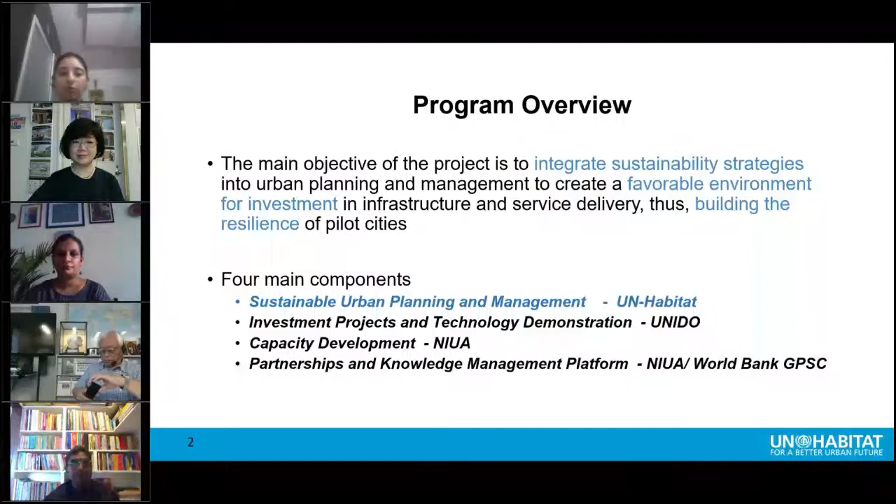Coming to the components of the project, there are 4 major components. UN Habitat is looking at sustainable planning and management. UNIDO is responsible for investments and technology. And the National Institute of Urban Affairs is doing capacity development and managing the platform for knowledge exchange for all the cities. So I'm going to break down the first component.

The major outputs are the Sustainability and Resilience Assessment Framework for Spatial Planning in India. This would be applied to the cities to develop city profiles and diagnostics, which would lead to the Sustainable City Strategy and specific actions and interventions. Finally, there's the Spatial Database for Continued Assessment that will enable the cities to run different scenarios in the future and test the impact of potential projects they want to implement in terms of their overall impact on the city.

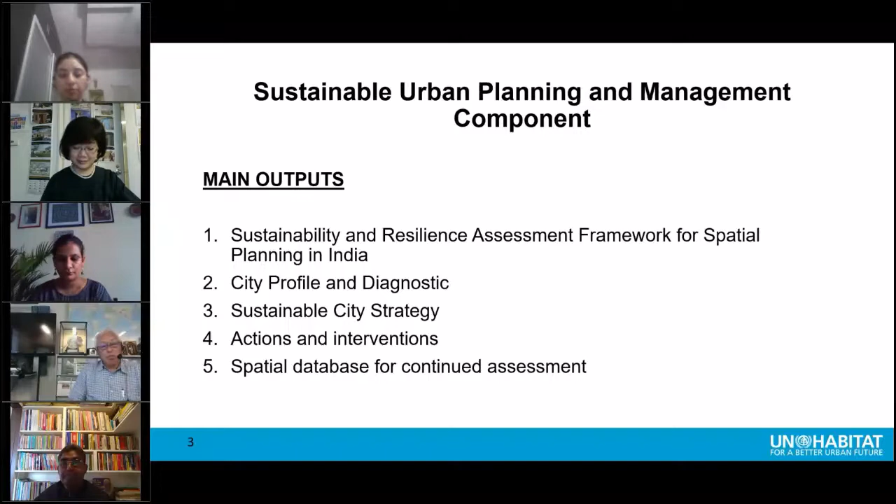Coming to output 1, this assessment framework is geared for spatial planning and is being developed by assessing select existing global and national frameworks. The indicators cover sectors including mobility and accessibility, density, disaster, health, sanitation, waste management, and so on. The idea is to understand how the city is performing on these parameters and benchmark them against global and national best practices. This framework would be scaled up and rolled out at the national level for other cities so it can inform the strategic direction and spatial growth of the cities.

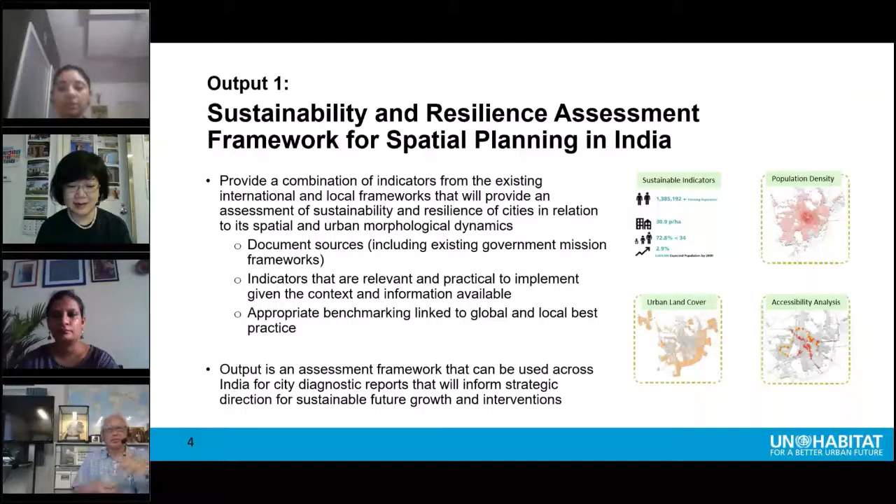The second output is the city profiles and diagnostics. These would be created by applying the assessment framework we are currently developing, then identifying 3 to 5 main sustainability and resilience aspects that the city needs to address, and examining the underlying causes for the indicators' performance compared to benchmarks. On the right side are example diagrams — not to say these will apply to our project cities. We have a map looking at walkability and job accessibility. In the diagnostic, the spatial analysis would show things like population distribution, where jobs are concentrated, and accessibility to essential services like clinics, schools, economic hubs, or public transportation, within a 10-minute walking distance, for example.

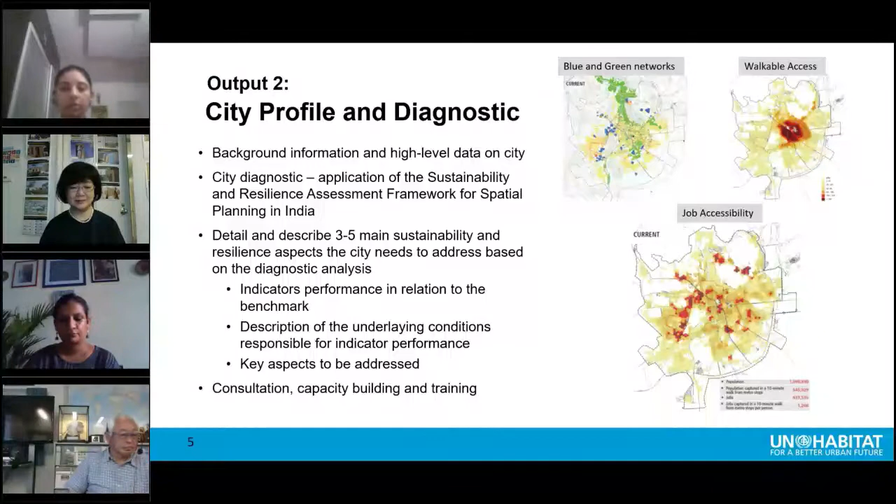That brings me to output 3, the Sustainable City Strategy. From the diagnostics and consultations with the cities, the strategy would identify strategic areas for intervention and investment. It would provide critical spatial and development interventions to address the main issues, analyze the current and proposed development scenarios and how that would impact the city's future, and include a methodology for strategic spatial planning and capacity building for stakeholders.

In this example, on the right side, the strategy of urban density shows the indicator shift as increased density in the city in the future. And that density increase would be at the right places to direct investment and planning together.

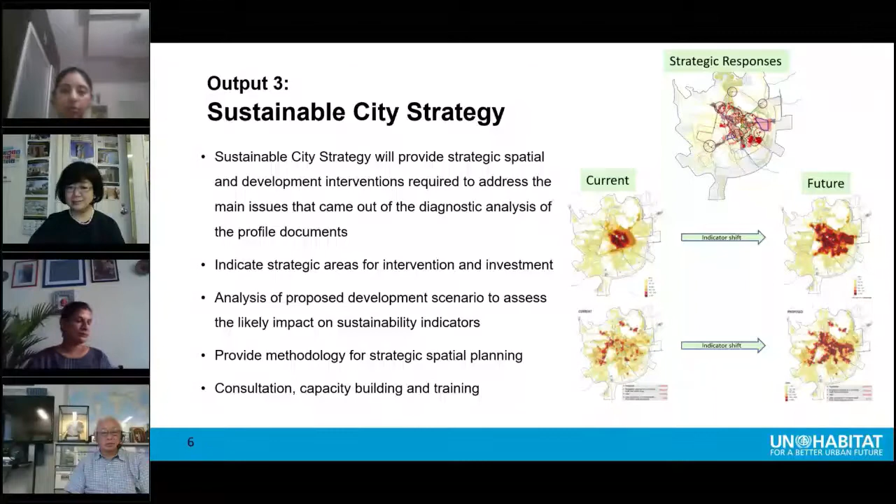Coming to output 4, which is the actionable next steps. These are the implementable interventions that would be identified, with potential projects that could be taken up, backed by data and evidence for the reasoning, and showing how it will shift the indicators towards sustainability. This would also include handholding for cities to adopt and institutionalize the methodology, and build capacity of the cities and regulatory tools for this type of data-driven planning and management.

So this is basically the summary slide highlighting the iterative process that we are following in the project for all of the outputs. The entire 3-year project is a process that has a feedback loop with the cities we are working on and with all the stakeholders. The main outcomes are strategic projects and interventions that we can identify in partnership with the cities, and then investors can be brought in to develop those projects with the cities.

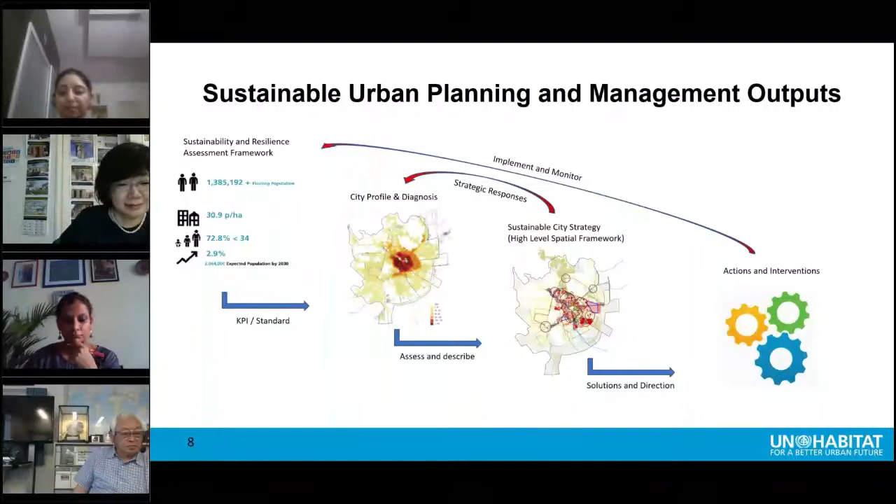May I now ask all of you to take another poll, which is what is the main reason for mismanagement of waste in your city? So kindly fill the poll. We see that broadly in cities, sometimes it's lack of segregation incentive mechanisms which lead to mismanagement of waste systems, or it's lack of administrative will, or probably sometimes the infrastructure does not support effective and sustainable waste management, or is it lack of robust policies or bylaws at city level to ensure compliance, or you feel is it all of the above? So kindly enter your answers.

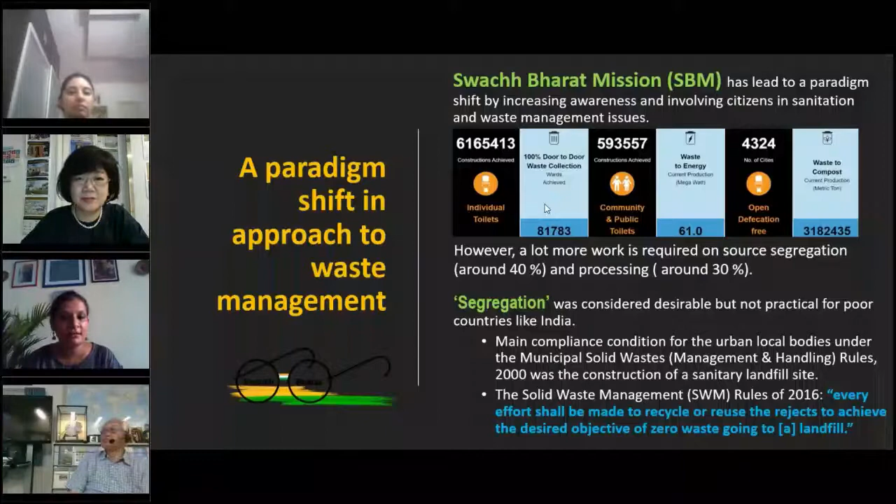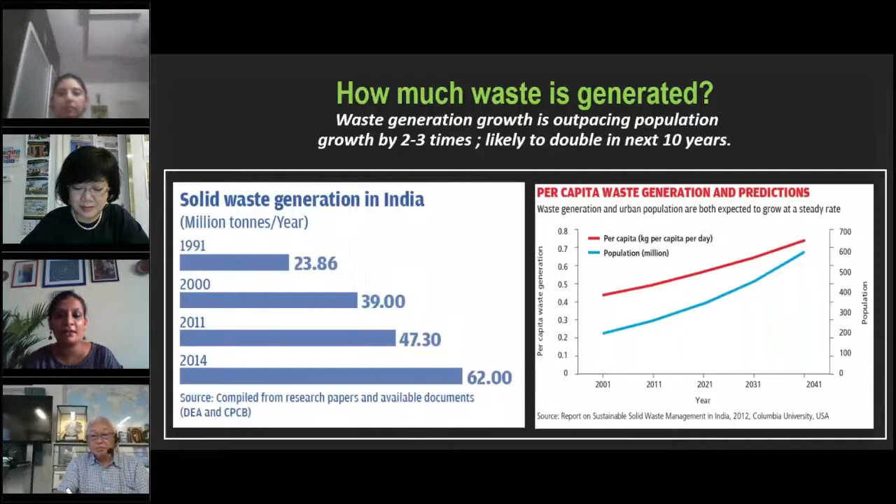Coming to where we are with waste management, of course, we clearly know that waste generation growth is outpacing population growth by 2 to 3 times. It's likely to double in the next 10 years. We are somewhere around 62 million tons per annum as per official figures, but we clearly know that the numbers are much higher because most of these values do not add up the waste managed by the informal sector. But we clearly know that as we are becoming more prosperous and developed, the waste generation patterns are also increasing.

Coming to the important question of landfills, every city, every ULB wants a landfill or they have numerous dump sites, but where is the land? As per various estimates, and as per the official 2016 estimates, India added about 31 million tons of waste to the legacy waste in its dump sites. As per a recent World Bank report, What a Waste 2.0, which came out last year, it said that in South Asia about 3/4 of the waste is dumped in open dump sites, which is quite alarming.

Another figure I'd like to share is that if we keep on dumping the way we are, by 2047 we'll reach a time when we would need land the size of Hyderabad, Chennai, and Mumbai added together just to dispose of our waste.

As per CPCB's latest data on dump sites, a report that came last year, India still has over 3,000 operational dump sites. Most of them are in Uttar Pradesh, which tops the charts with the number of dump sites, followed by Madhya Pradesh and Maharashtra.

If you look at the interventions happening in India in terms of remediation of these open dump sites, or what we call landfill remediation, it's majorly limited to landfill capping and biomining, which are considered to be the two most common solutions practiced on the ground in various cities.

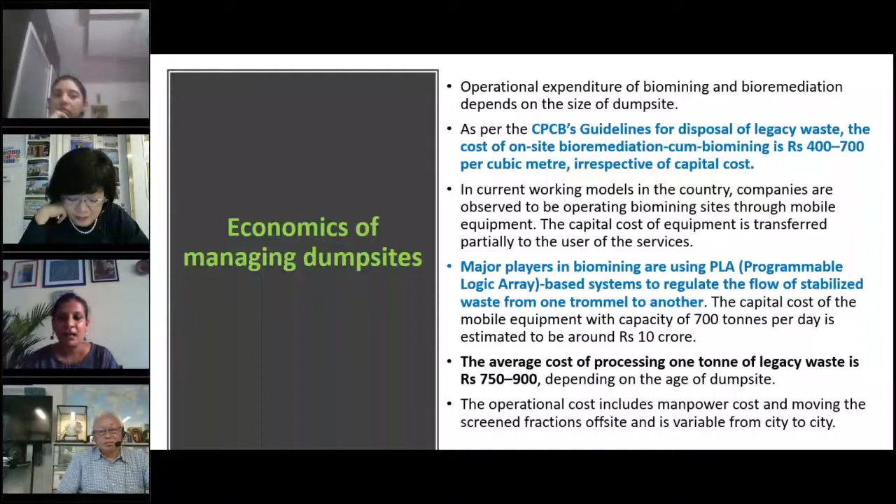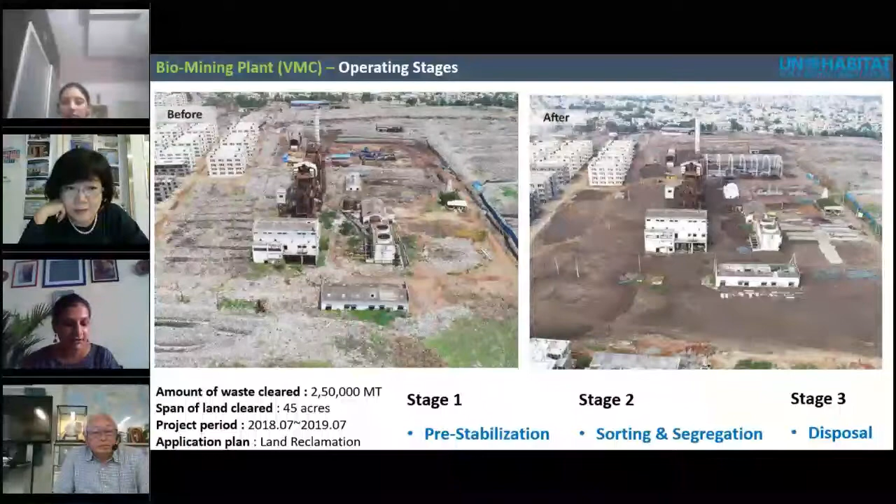Taking you forward with an example of an intervention that happened in Vijayawada, where an existing dump site was remediated. As we can see, over 250,000 metric tons of waste was cleared from this site. You can see the before and after pictures, and about 45 acres of land was remediated over three stages.

The three stages were pre-stabilization, sorting and segregation, and disposal. The project took about a year for reclamation of the land.

These were some of the interventions: after segregation from such a facility, the fine soil is typically used for afforestation purposes. There's still some soil which is not good enough to be directly used for horticultural practices, but it could be used for filling in low-lying areas.

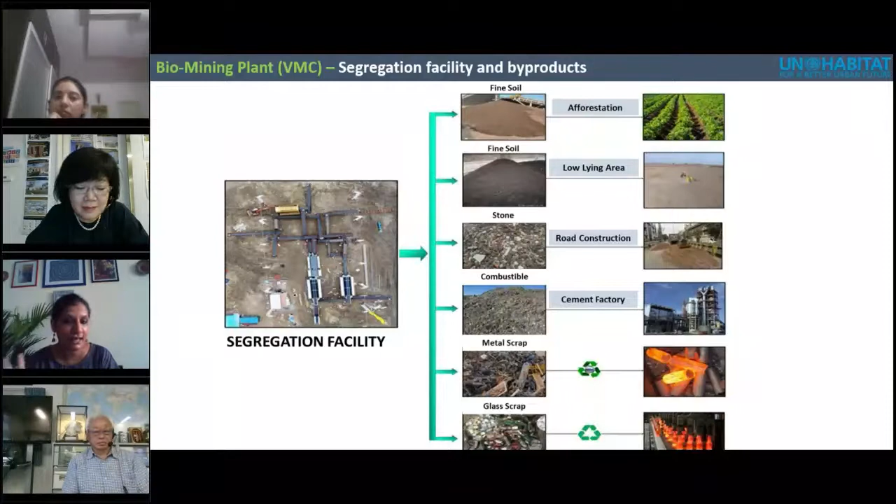Stone is used for road construction or embankments. Most of the combustible fraction that comes out from legacy sites could go to cement factories or incineration plants. Metal scraps and glass scraps could go for recycling. So majorly, this is the protocol being followed.

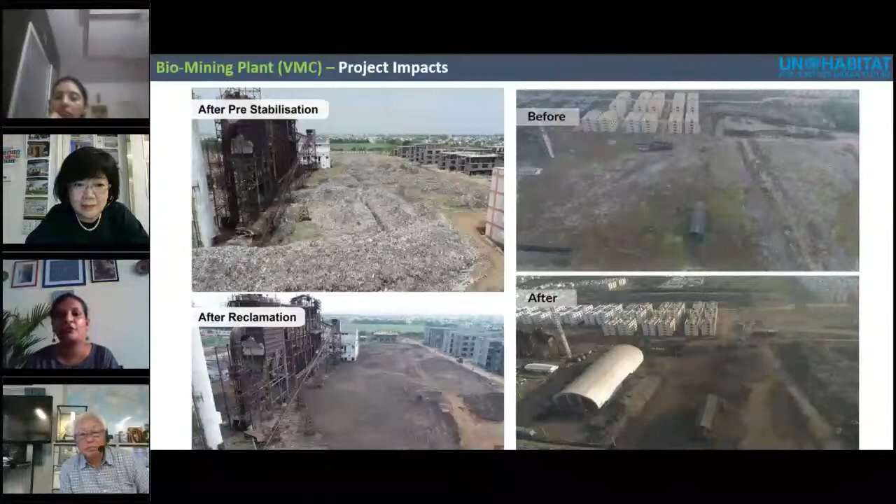You can clearly see the pictures after pre-stabilization and reclamation, and how the site looked before and after.

But there are a few challenges that remain, and I'll leave you with those questions. One is that urban waste management is expensive. If we look at municipalities in India, typically municipal budgets account for only 10% for solid waste management.

Many municipalities lack this budget to opt for landfill remediation. So probably a small city in Bihar or a small city in UP with a major issue of dump sites won't be able to go for such technologies because they don't have the bandwidth or budget to take these interventions forward.

There's also an urgent need to look at affordable and effective integrated solutions for landfill site management. In the Indian context, we basically need more solutions for dump site and landfill management focusing on utilization of local resources, which emphasize segregation, recovery of recyclables, and provide jobs to the informal sector, which is critical.

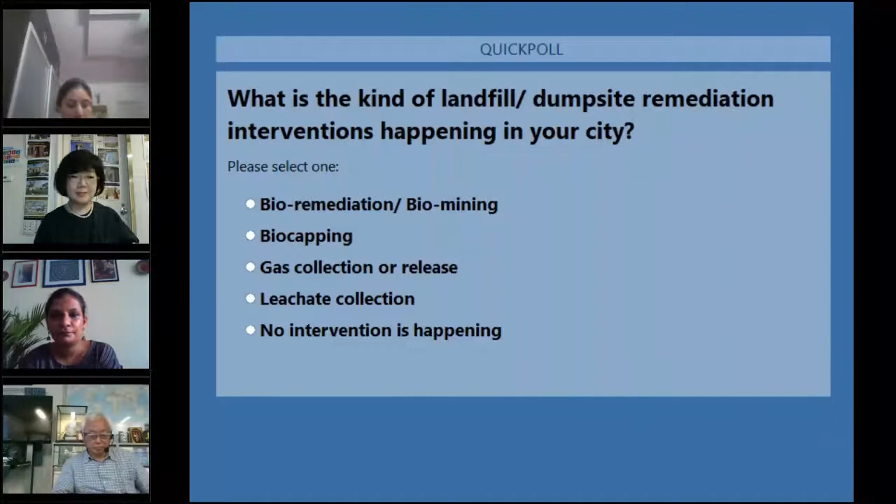So please take your time to fill up what kind of landfill dump site remediation interventions are happening in your city. Is it bioremediation? Is it biomining? Is it biocapping? Have there been interventions on gas collection or release, on leachate collection, or is there no intervention happening at all?

Okay, can we publish the results of the poll?

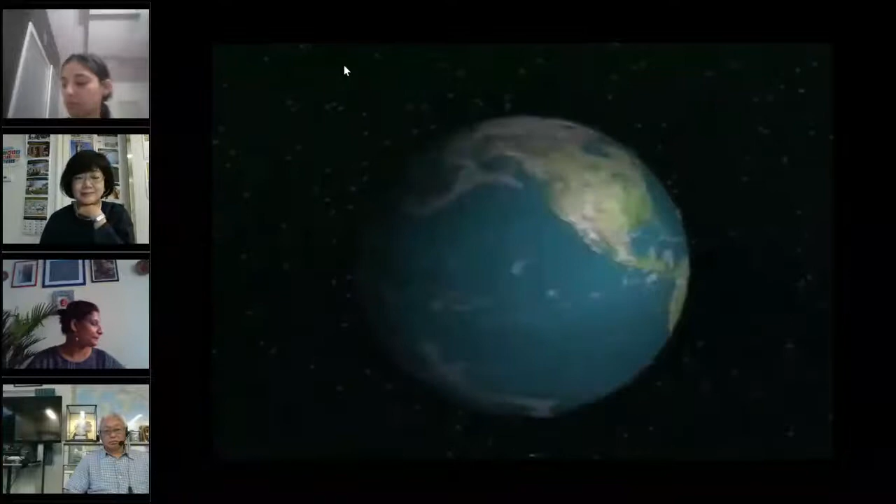The Japanese islands, situated on the western rim of the Pacific Ocean. Fukuoka City, located on the northern part of Kyushu, one of the Japanese islands, has a population of about 1.3 million. As one of the leading cities in Japan, this metropolis continues economic development, but despite its million-person population, still maintains an excellent urban environment.

From the late 1960s through the 1970s, however, Fukuoka City faced severe problems related to the management of waste generated by this economic development. At that time, most waste was disposed of through simple landfill, and landfill management efforts were unable to keep pace with the influx of waste. The landfills generated noxious odors, contaminated leachate, and methane gas, and often suffered major subsidences.

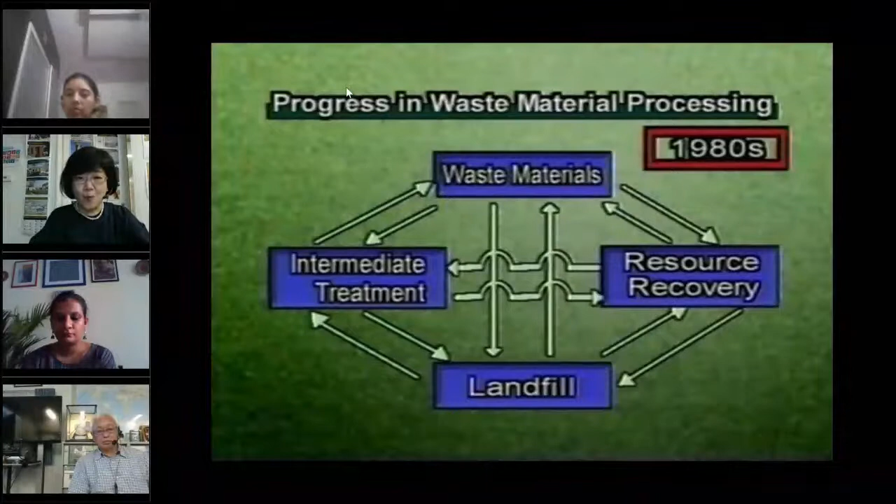To resolve these problems, Fukuoka City constructed a series of intermediate treatment facilities, and at the same time launched a joint research program with Fukuoka University. Today, these efforts have resulted in landfills maintained in excellent condition.

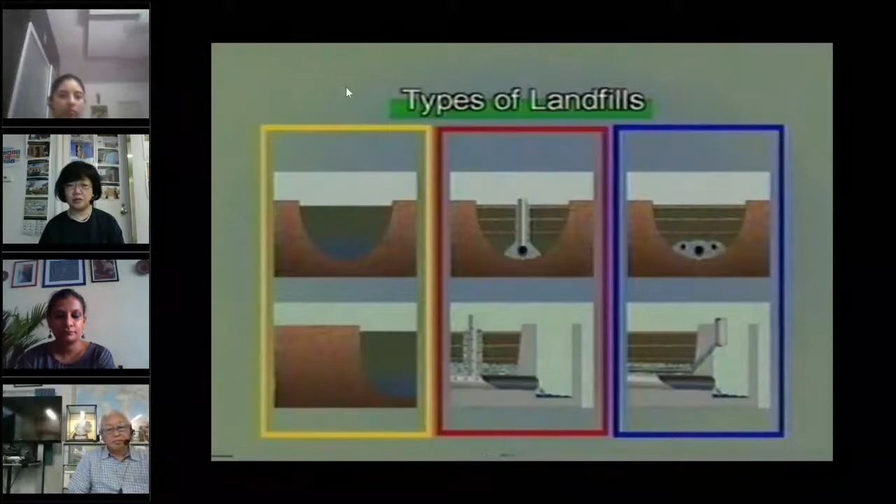Let's take a closer look at the Fukuoka method. Fukuoka University noted the importance of air and microorganisms in the landfill waste layers, and classified landfills into three types: the conventional anaerobic type, the semi-aerobic type, and the aerobic type.

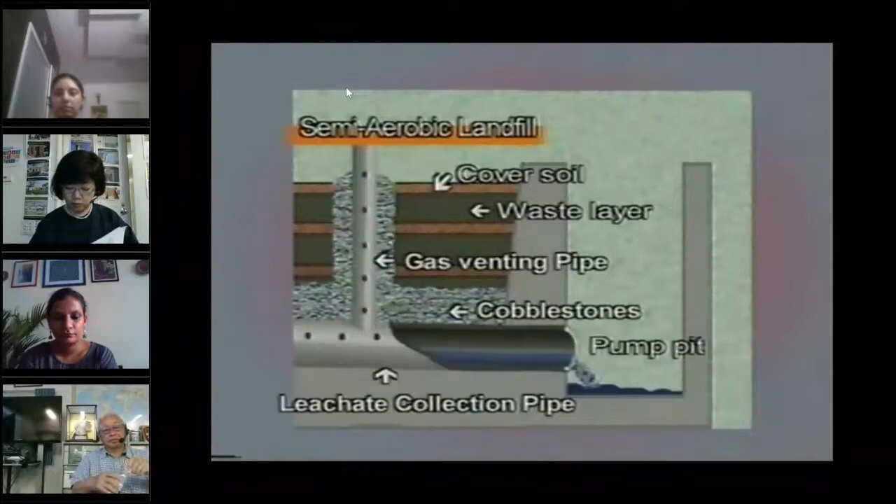The concept of the semi-aerobic landfill was developed and proposed by a group led by Professor Masataka Hanashima of Fukuoka University. After the concept was demonstrated through practical trials implemented jointly by Fukuoka City and Fukuoka University, it was christened the Fukuoka method.

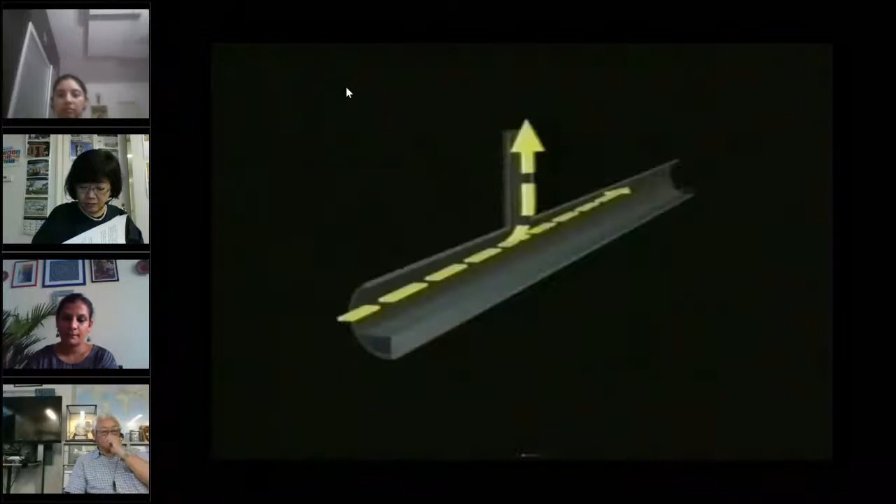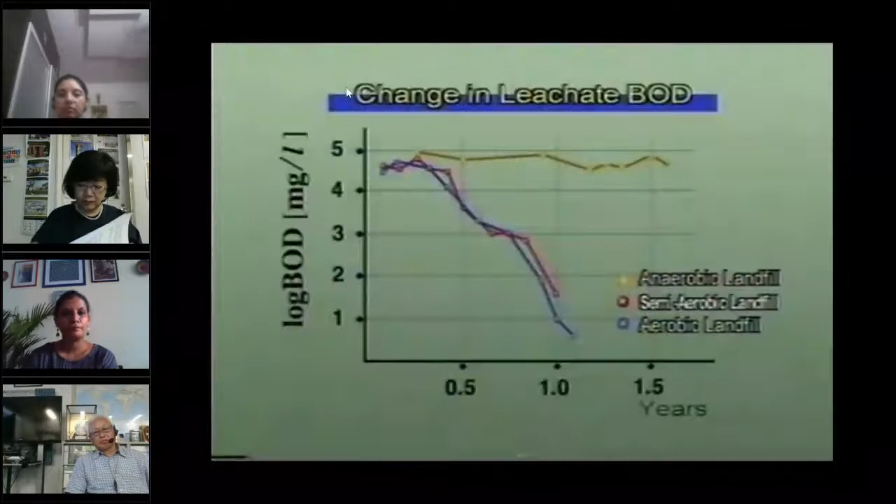The basic structure of the Fukuoka method landfill is a network of perforated pipes with a sufficiently large cross-section laid across the bottom of the landfill. This design not only prevents leachate from stagnating in the waste layers, it also utilizes the thermal convection currents generated by microbiological reaction within the waste to draw outside air into the landfill through the drainage pipes. This flow of air promotes biologic activity by the aerobic microorganisms, which improves the quality of the leachate flowing through the waste and suppresses the generation of methane gas.

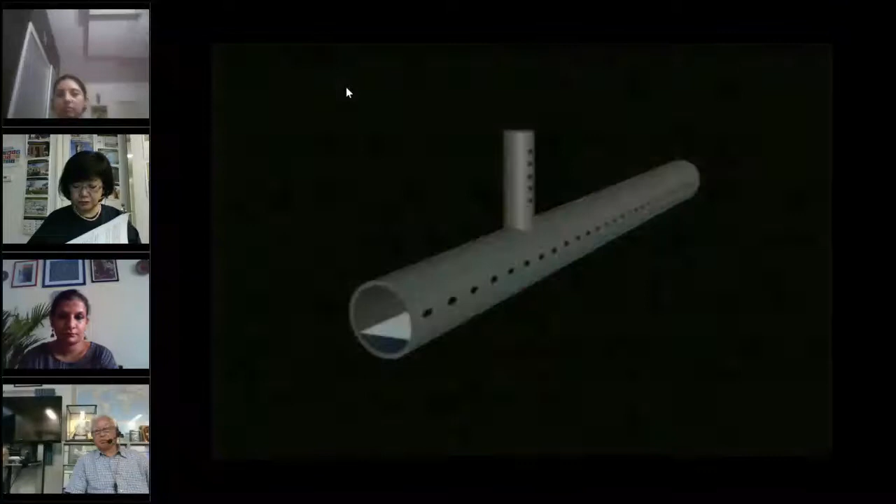The Fukuoka method has an extremely simple structure and is simple to maintain and manage in operation.

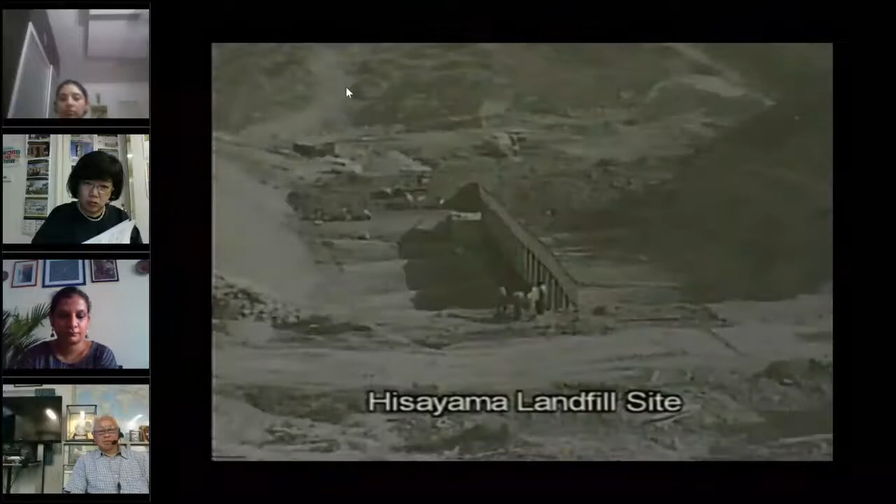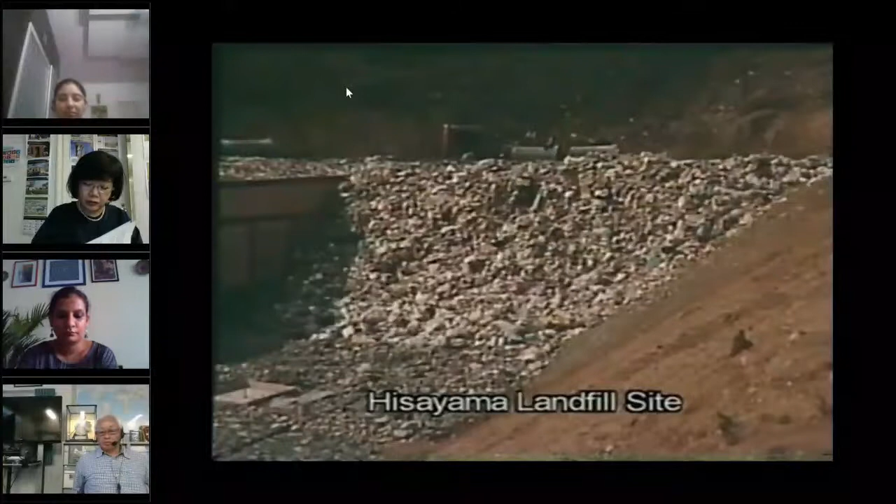Based on fundamental research initiated by Professor Masataka Hanashima in 1966, the first trials of the Fukuoka method were held in a large concrete container. Initial results were good and led to large-scale testing at the Hisayama landfill site as consigned research from the Ministry of Health and Welfare for a 3-year period from 1973. The tests demonstrated that the design has a significant effect on leachate quality.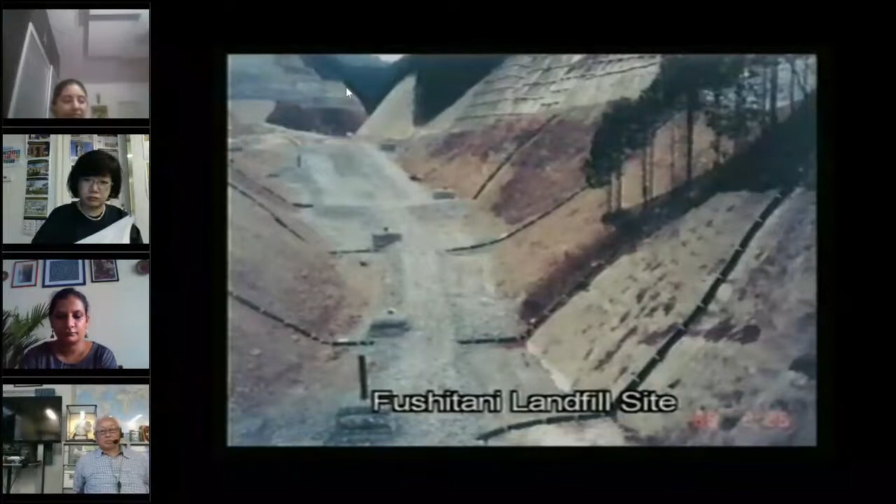Based on these test results, Fukuoka University formally proposed the new semi-aerobic landfill type. Fukuoka City responded by adopting the new landfill design in its Shin-Kamata landfill site as the first implementation of semi-aerobic landfill technology in Japan. The Busetsugaura landfill site was designed and constructed as a full-scale semi-aerobic type. The research and full-scale demonstration were well received throughout Japan, and a number of local governments adopted the semi-aerobic landfill technology as a result. By about 1975, the new technology was widely known as the Fukuoka method.

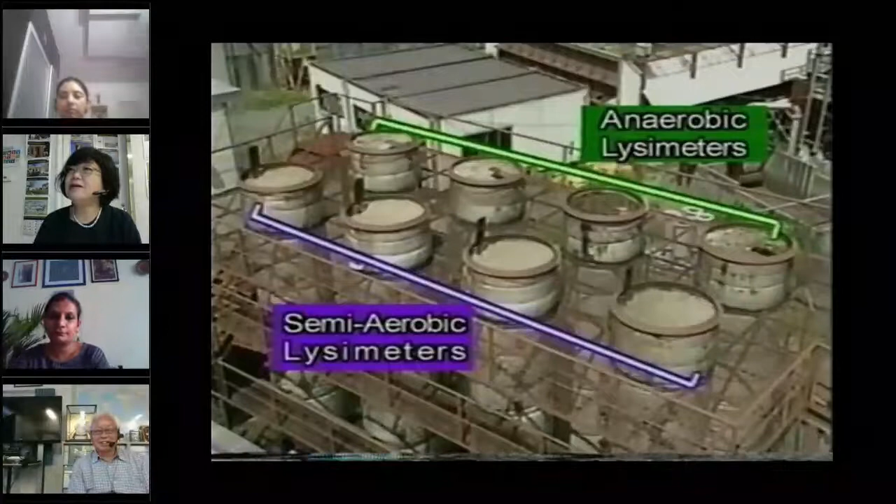Today, the Fukuoka method has established itself as the standard type of landfill in Japan. Fukuoka University has continued to develop a variety of landfill structures and systems, and tests are yet underway to further enhance and expand the functions of the landfill. Fukuoka City has incorporated these improvements in the construction of its Fushitani and Nakata landfill sites.

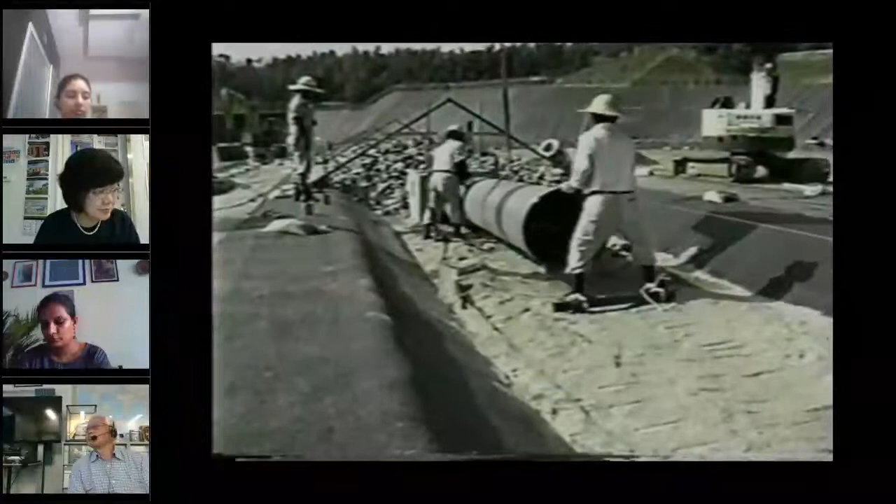Here are the major components of the semi-aerobic landfill type. The floor of the landfill is equipped with leachate collection pipes and gas ventilation pipes. The leachate collection pipes are perforated plastic pipes, surrounded with a sufficiently thick layer of small stones.

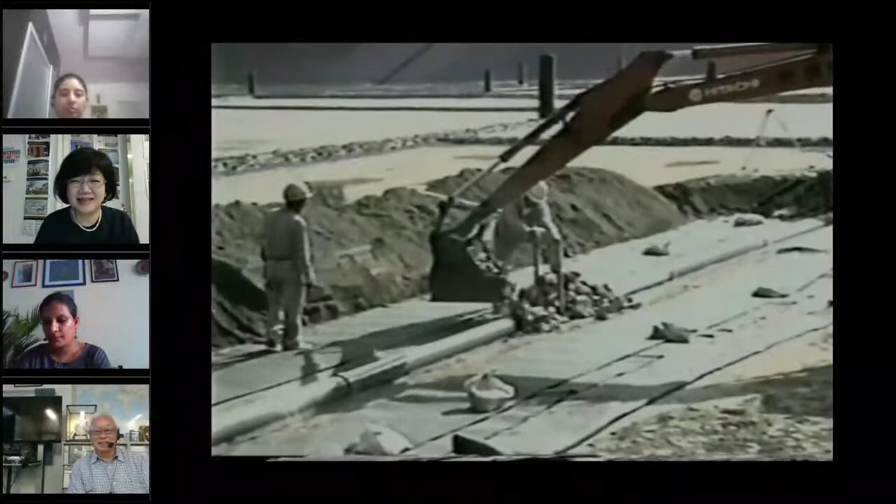Most of the waste disposed of by landfill in Fukuoka City is non-combustible waste, and therefore the gas ventilation pipes are installed at a 40-meter pitch. This pitch would have to be tightened up for landfills with larger ratios of organic materials.

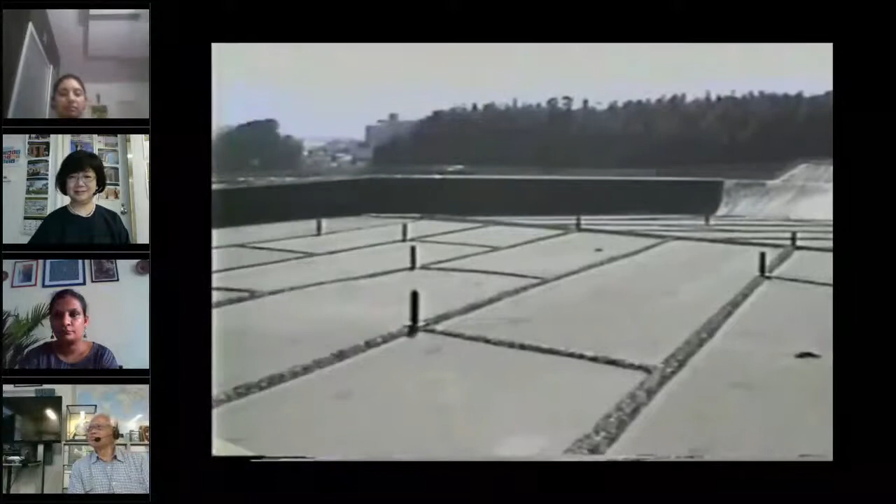The Fukuoka method can be implemented throughout the Asian Pacific region at low cost. Professor Yasushi Matsufuji of Fukuoka University, dispatched as a long-term expert by the Japan International Cooperation Agency, JICA, spearheaded the transfer of Fukuoka method technology to the Ampang Jajar landfill site in Malaysia as the first trial of the method in Southeast Asia.

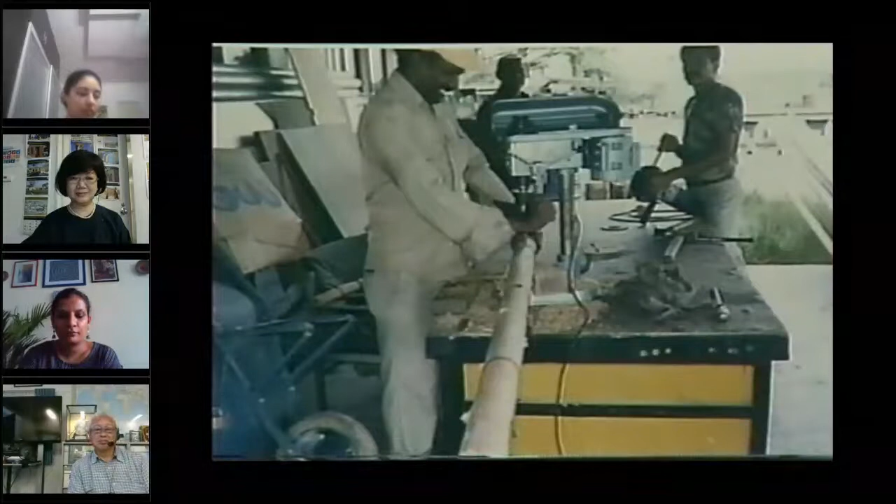In this landfill, leachate collection pipes were fabricated out of locally available bamboo. And the leachate was recirculated to further heighten the water cleansing effect. Water quality was improved significantly by reusing waste activated charcoal, also available locally. A variety of gas ventilation pipes were used, made of assemblies of wood or bamboo, stacks of old tires, and steel drums.

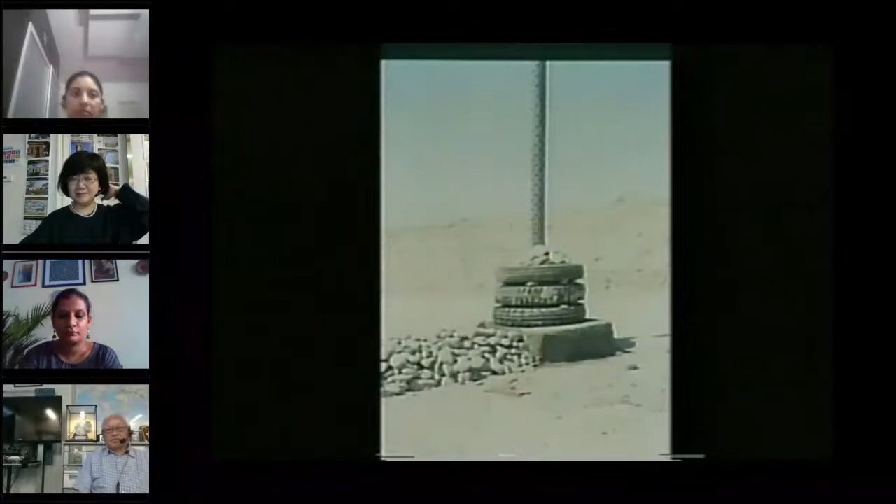The Fukuoka method can be implemented using materials readily and inexpensively available in each locale, making it a simple, convenient technology with a wide range of application. This landfill site was rated highly as a successful example of an ODA-sponsored JICA project, and has attracted considerable attention not only in Southeast Asia, but also in Central and South America.

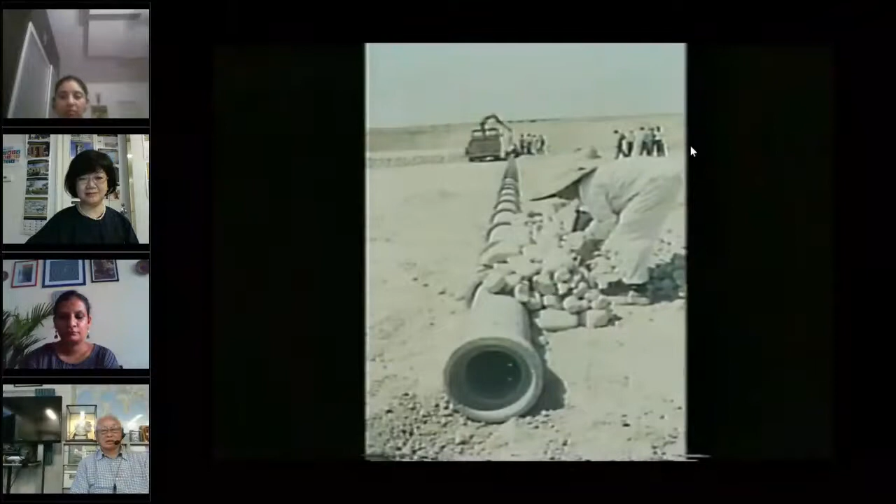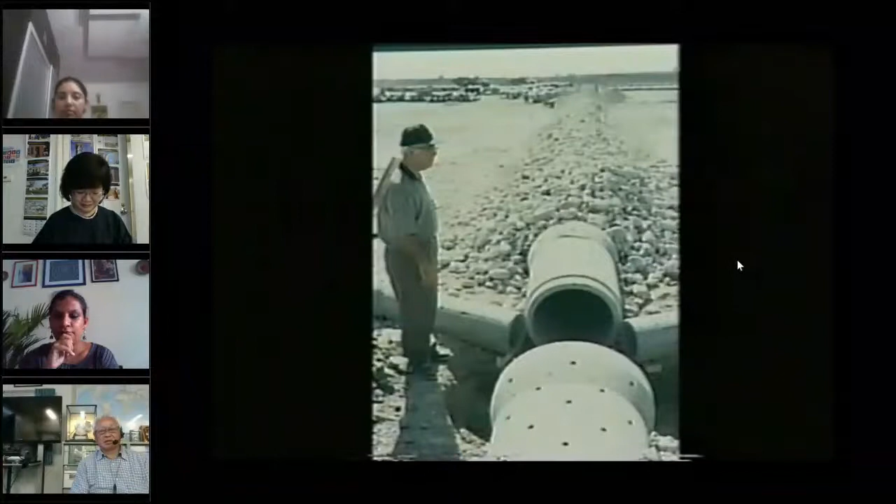Habitat, the United Nations Center for Human Settlements, opened its Fukuoka office in 1997 and requested the assistance of Fukuoka City and Fukuoka University in an ongoing project in the Islamic Republic of Iran. The project focused on methods of controlling the emission of methane gas, classified as a greenhouse effect gas, from landfills in that nation. One noteworthy point about the new project was that the connection boxes on the leachate collection pipes and the gas ventilation pipes in the landfill were made of brick, a material readily available in Iran.

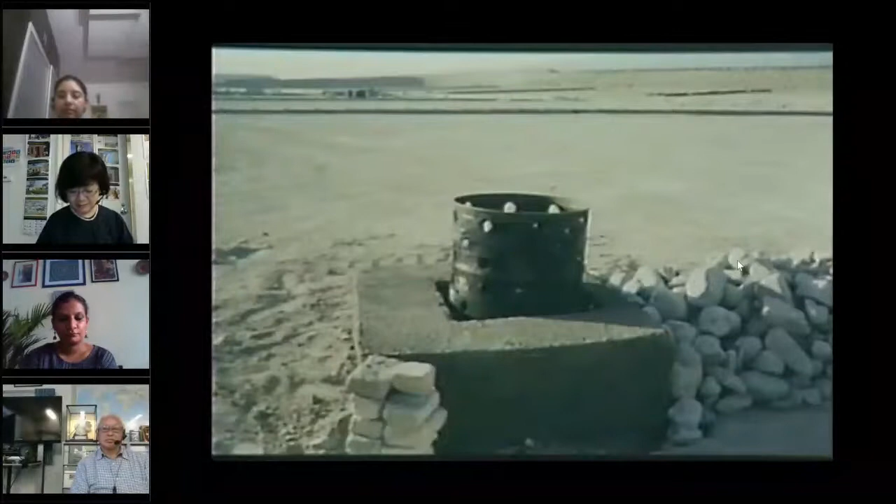The completed project is being monitored in operation now, and expectations are high as it marks the first application of the technology to the Middle East. Training workshops were also held for local engineers.

Habitat is an official agency of the United Nations, established to contribute to an improvement of the residential environment for human beings. The Fukuoka office focuses primarily on the Asian Pacific region. Habitat recognized the advantages of the Fukuoka method in improving the environment around landfill sites, and is actively promoting it throughout Asia and the Pacific.

The Fukuoka method is a way to work with nature to reduce the impact of landfill sites on the environment. At the same time, it is a technology that does not require high capital investments or highly trained specialists. For these reasons, it is the most appropriate technology for developing as well as developed countries. We appreciate the advantages of the Fukuoka method and will continue to encourage countries in Asia and the Pacific to consider adopting this technology.

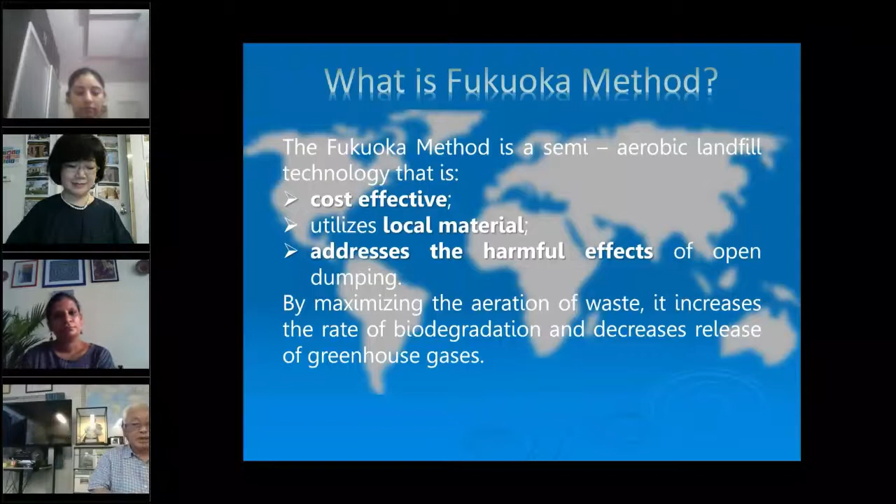Next slide. I will begin with the years when the city first faced the problem of solid waste management with rapid economic growth and population increase, similar to current India. Next slide, please.

In 1971, the government of Tokyo declared the garbage war, which became the starting point to overcome the municipal waste crisis. Next slide, please.

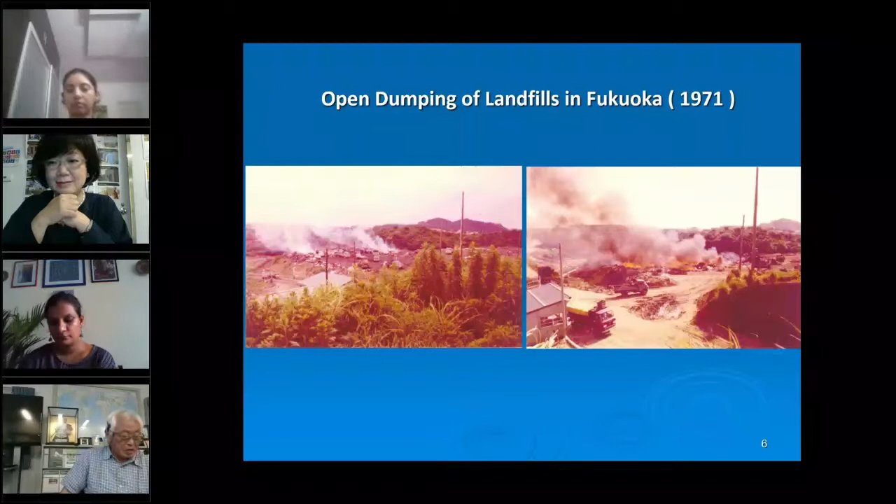Coming closer to Fukuoka city, it also experienced a population increase and urbanization in the 1970s. The city was having a difficult time handling the increasing amount of waste. As you can see in the photograph, fire was breaking out, and extinguishing fire was the city's major work every day, as shown in this photo. Next slide, please.

Under these conditions, the Fukuoka City government and Fukuoka University, my university, decided to undertake a study on solid waste landfill, which was the first of its kind in Japan. Next slide.

The research study was a joint effort and strong initiative by Fukuoka City and Fukuoka University for over 3 years, from basic study to advanced level. Research on biodegradation of the waste layer placed in a wooden lysimeter in aerobic condition using an air blower. This is considered the first and one of the most successful models which led to the development of the Fukuoka method. Next slide, please.

Look at this figure. The graph shows the change in the leachate quality generated from the waste lysimeter. From this experiment, we can see the BOD and total nitrogen concentration was largely reduced by blowing air into the landfill model lysimeters, shown in this slide. Next slide, please.

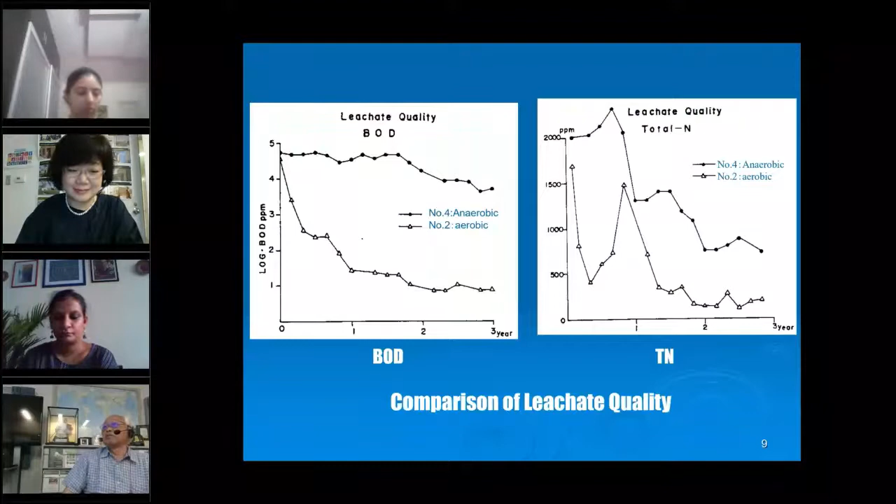The test lysimeters were dismantled after 3 years of experiment. The two photos on the right side show the waste condition 3 years after it was landfilled. Look at this photo. The top photo shows the waste degradation without direct air blowing into the waste layer. The bottom photo shows the waste degradation with air blowing. The waste degradation result was obviously different with or without air. You can see that in these two photos. Next slide, please.

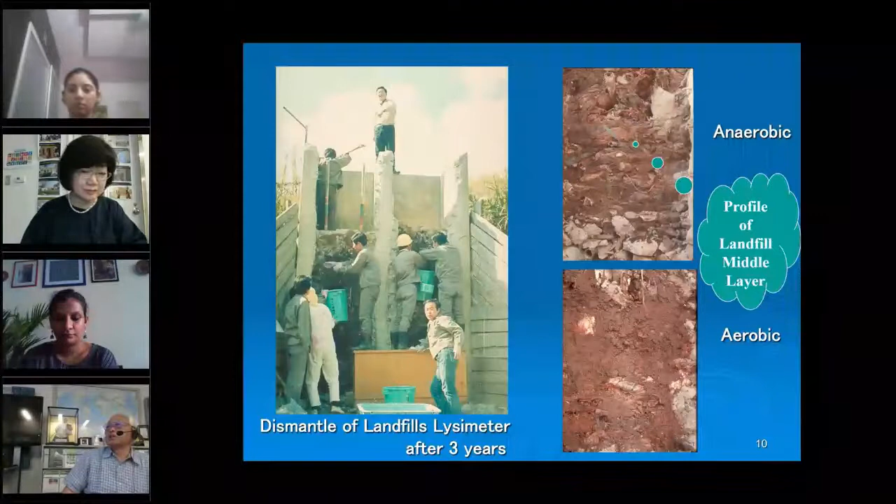After the positive result of the lysimeter test, a larger actual-scale landfill test started in 1973. This was a feasibility study of the aerobic landfill type with two large-scale demonstration plants, each 40 meters width by 5 meters height. This monitoring with organic waste continued for a further 3 years. Next slide, please.

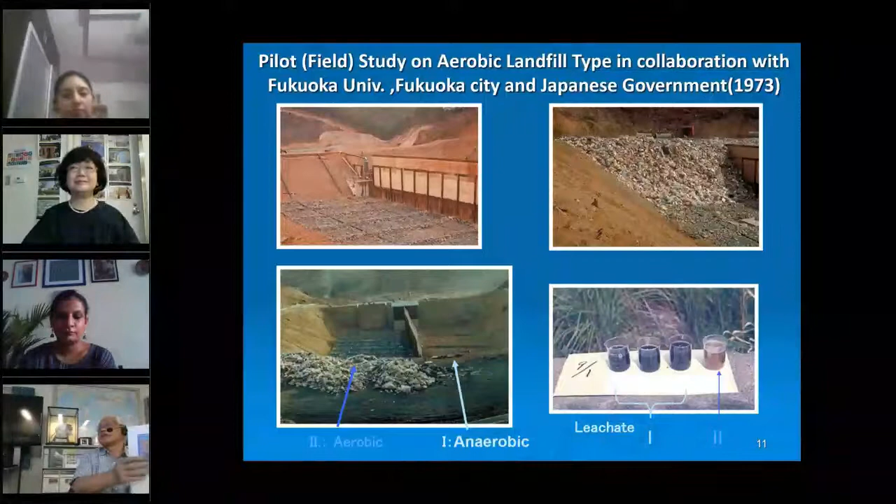As a conclusion, we were able to propose a new landfill concept. It means that if a landfill is in aerobic condition, the landfill not only functions as a dumping site, but also can function as an effective treatment tank. From these large-scale demonstration plants, we were successful in proving the effectiveness of the new landfill concept under the aerobic landfill type.

However, the research concluded that an aerobic landfill using a blower was not practical in real situations. The reasons were that the construction and maintenance cost was too high and maintenance was very difficult. However, during the experiment, we happened to encounter a new discovery. We often say that failure teaches success, or new discovery is hidden in negative data.

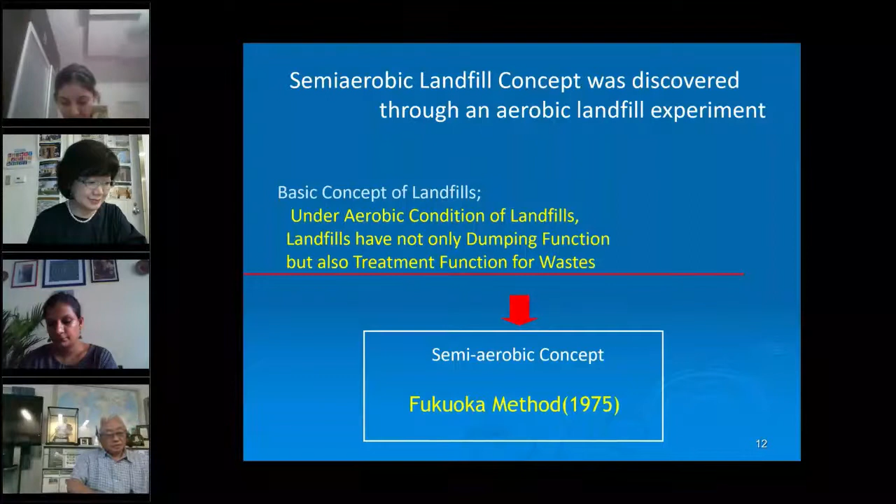While striving to find the causes of the negative data, we found a new waste decomposition mechanism, which later became the basis of the Fukuoka method, and proposed one hypothesis. This is the semi-aerobic landfill type. Presently, it is known as the Fukuoka method worldwide. Next slide, please.

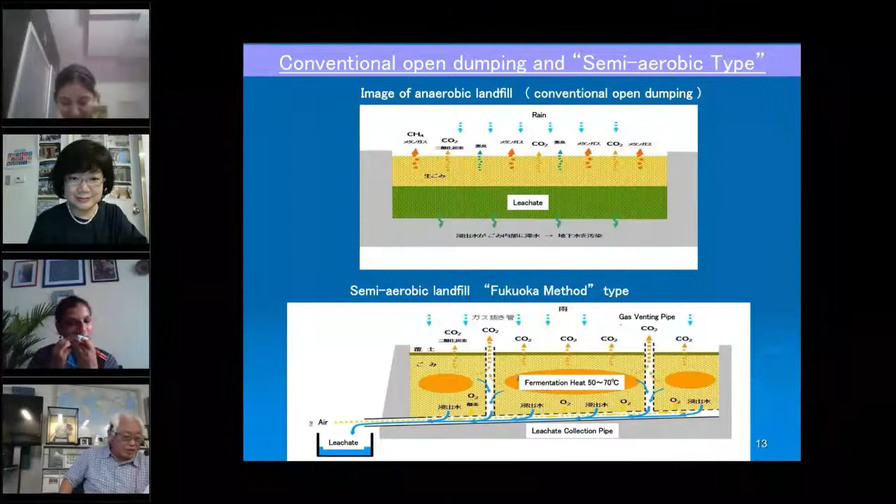From here, I would like to talk about the mechanism of the characteristic of the semi-aerobic landfill type. The top drawing is the traditional landfill model, the bottom drawing is a new landfill model using the new semi-aerobic landfill type. The semi-aerobic landfill type installs the perforated leachate collection pipe at the bottom of the landfill in order to effectively collect leachate as soon as possible.

Through the leachate collection pipes, leachate in the landfill is swiftly removed to the outside of the landfill. At the same time, fresh air naturally flows into the waste layer from the bottom of the landfill. This is due to the fermentation heat and convection effect generated by microorganisms' activities in the waste layer. By applying the mechanism, even without a power blower or electricity, a landfill is naturally able to improve itself to aerobic condition by the install of leachate collection pipes in the bottom of the landfill.

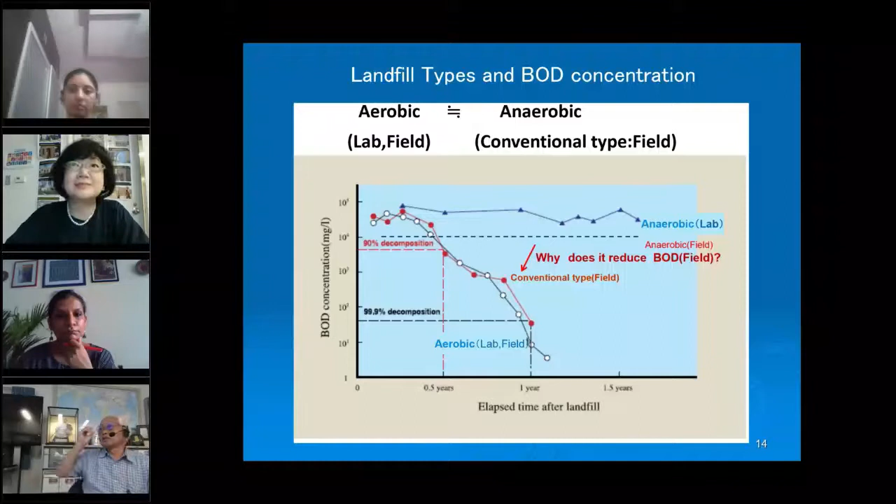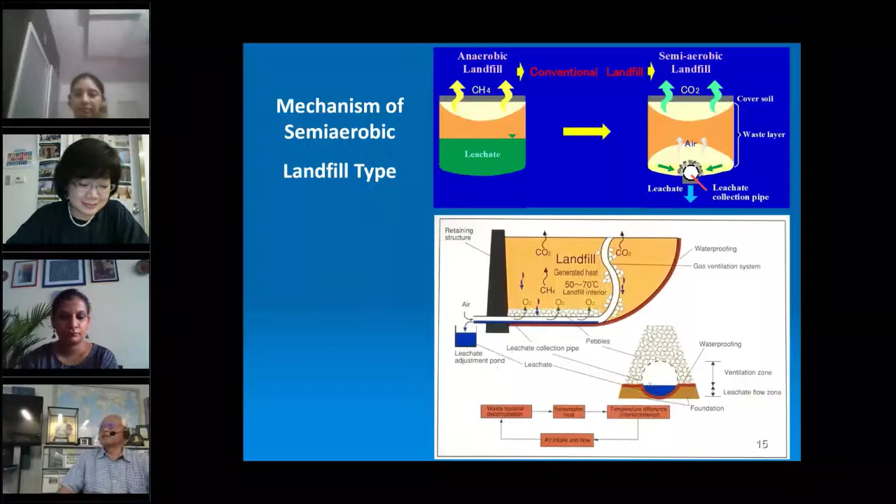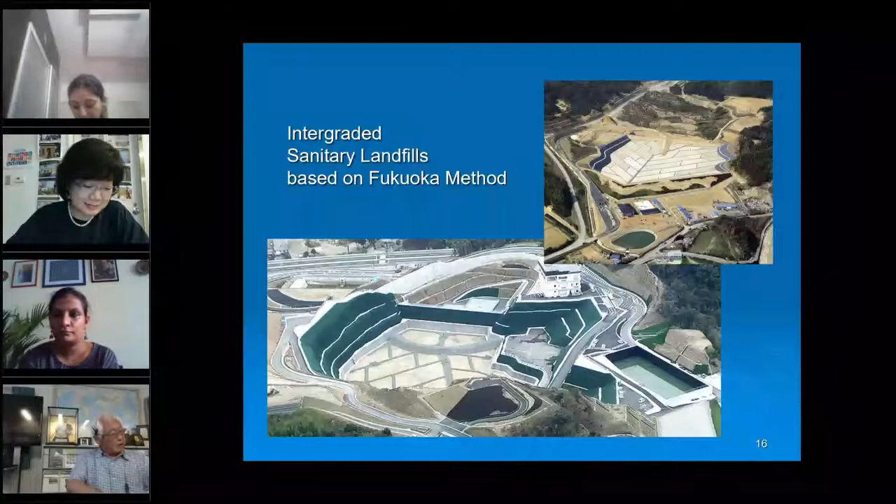As already mentioned in this video, the first initiative was a technical transfer of the Fukuoka method in Malaysia. At the time, I was dispatched as a long-term expert of JICA, Japan International Cooperation Agency, to Malaysia for 2 years from 1988 to 1990, and worked on the improvement of the existing landfill using the semi-aerobic concept. This was the first technical transfer of the Fukuoka method overseas.

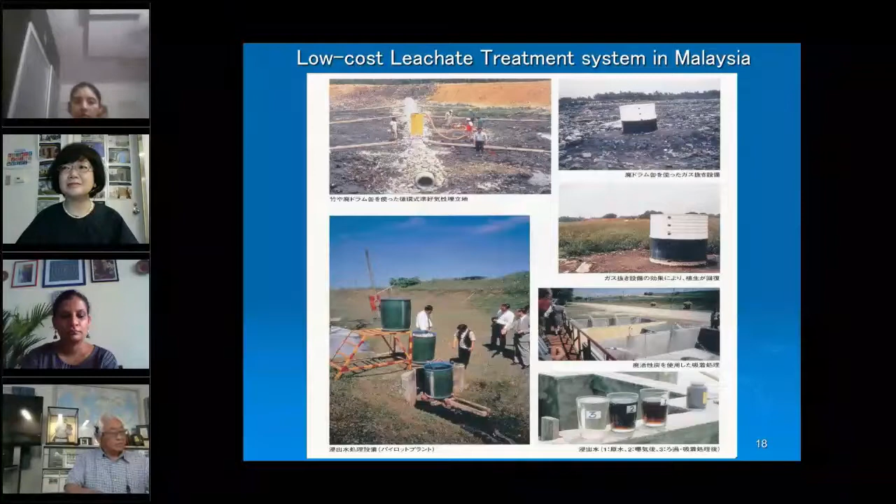From this example, you would understand the Fukuoka method is a technique to improve the landfill condition in the various stages of countries, even in countries with lack of the 6Ms. That means lack of money, manpower, material, management, maintenance, and motivation. We call it the lack of the 6Ms. Every country faces the very same situation, I think.

The Fukuoka method also makes it possible to improve their landfill step by step. The photo shows the progress of landfill improvement in the Malaysia case study. Recently, the Japanese government and UN Habitat highly evaluated this Malaysian project as one of the success stories based on the semi-aerobic landfill concept. So next, I would like to hand over to the excellent presenter, Miss Sachio, please.

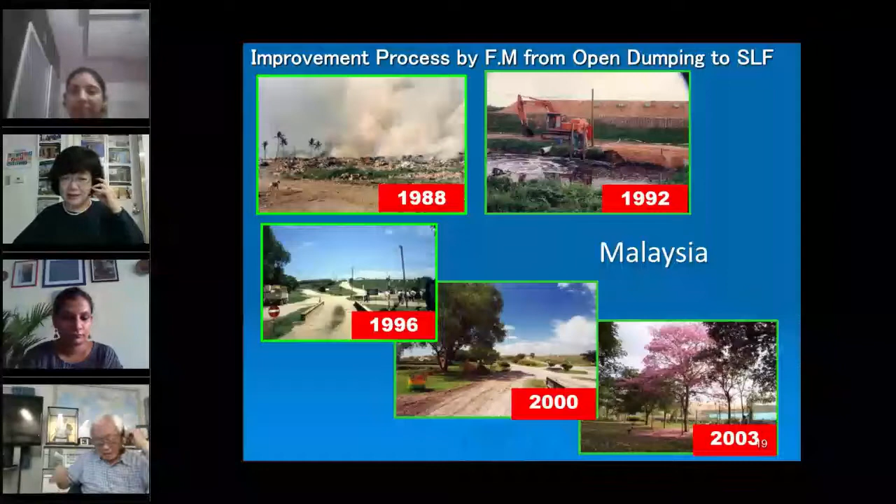Thank you very much, Professor. I hope everybody can hear me. From here, next slide, please. May I ask for the next slide?

We are currently handling the application of the Fukuoka method in a number of solid waste management related projects in Africa and Asia. In the last year or two, I was fortunate enough to travel to over 10 countries with Professor Matsufuji. Traveling is nice, but the reason we have been invited to many countries is because there are issues, and it was quite alarming.

We are seeing in many countries increasing urbanization of waste. The volume is increasing, the composition of waste is changing, and due to increasing heavy rain at one time, there are increasing incidents of accidents at dump sites, such as fire, gas explosions, and landslides. This is in addition to already existing issues such as leachate and contamination of land and water bodies. What is also alarming is that this is occurring everywhere, not just in tropical climates, but in Africa and Asia as well.

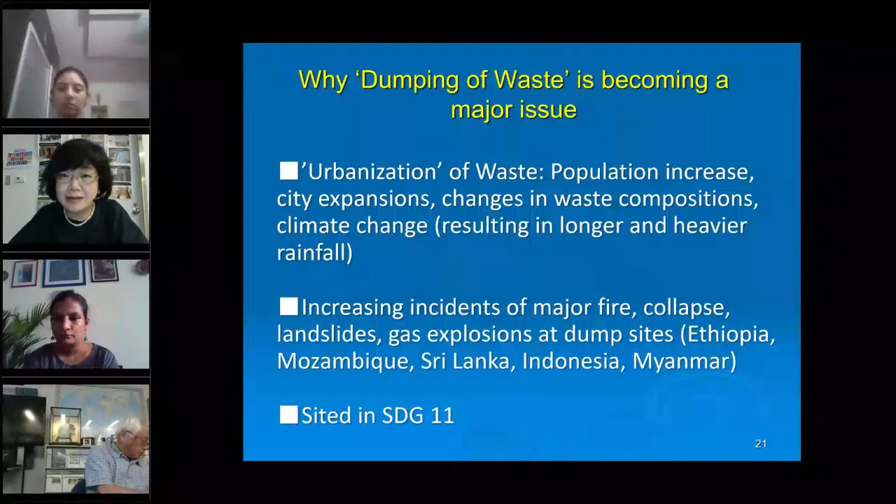This is one of the main reasons why we are invited and called to assist these countries and cities. As you have just heard from the professor, the Fukuoka method was found to be beneficial and practical to many countries for these reasons. It can be applied at low cost with simple technology, and it is proven to be environmentally friendly.

In particular, which we think is quite applicable to the context of India, is that open dump sites could be properly and safely closed and used for other purposes. It is able to utilize local materials and manpower, which contribute to job creation and skills development of workers, operators, and waste pickers. Most of all, it is possible to start from any stage of the dump site, whether from scratch, from planning and design, or to improve a 40 or 50-year-old de facto dump site and convert it into a Fukuoka method sanitary landfill.

From here, I would like to quickly share snapshots of the Fukuoka method applied in many countries in varying contexts. The first one is Iran, which you already saw in the video from the Professor, to show you that it is also applicable in a very arid and desert dry climate.

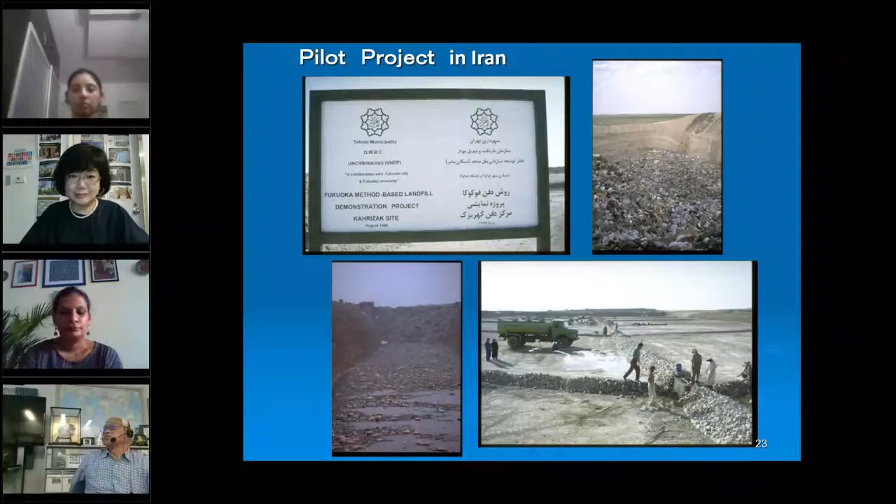The next one is the Pacific island of Samoa. It is to show you that it is also possible to address island contexts, which is sometimes very difficult.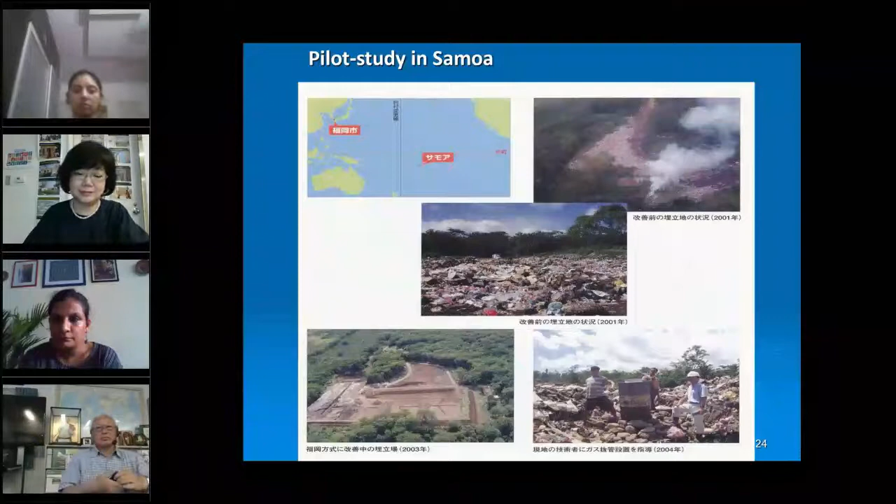This was a project in Pakistan, which I believe the climate context might be relevant to many cities in India.

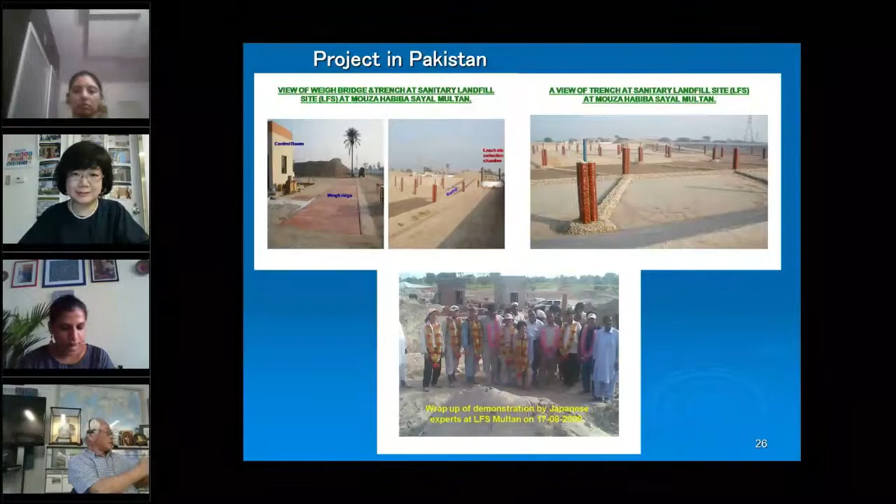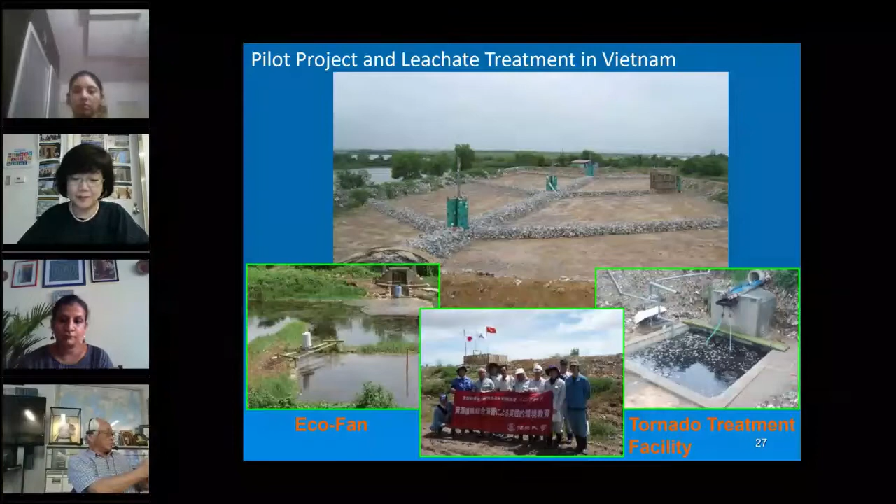This photo is a small pilot scale project undertaken in Vietnam. After it was completed, they planted papayas and fruits after the closure of the pilot scale, and it is growing beautifully now.

From here I would like to introduce our recent projects undertaken by UN Habitat under technical advice of the Professor and his expert team. This is in Kenya, in a suburb city outside of Nairobi, the capital city. This is right after the Fukuoka method landfill was just completed. You can see the Professor and myself in the photo. It may look different from the photograph shown to you earlier, and of course it is not as sophisticated as the one you saw, but the basic concept, the core function, and the effect are just the same.

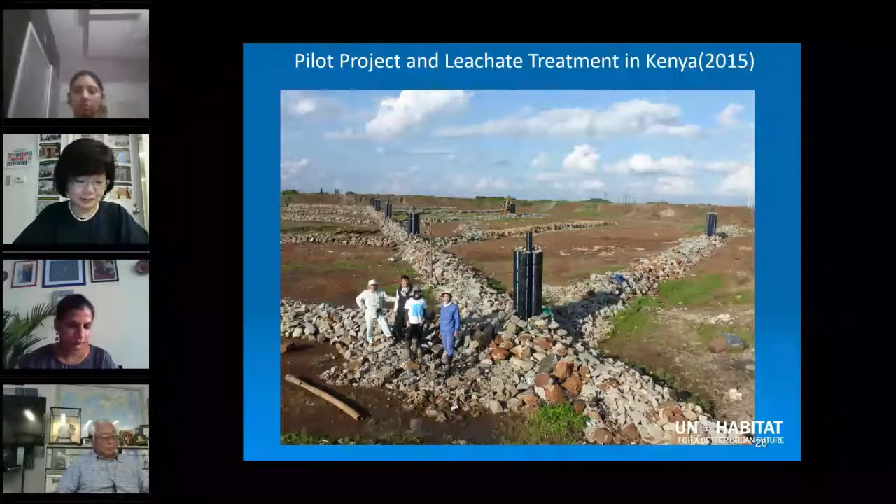What I wish to share with you here is that only 10 months before this photo, the state of waste was like this. In less than 10 months, we were able to push the waste and utilize this as embankment of the landfill, and constructed the new Fukuoka method landfill, the very first new model in Africa.

The next project is in Ethiopia, which is still ongoing now. This was a dump site in Addis Ababa city. For over 30 years, this was the only dump site which served the entire capital city, with a population of 3.3 million. The size is roughly 42 hectares, and the height at the highest point is 50 meters. You can perhaps see the tiny small figure in the previous photo.

We're still on this one. You can see the tiny person standing at the top of the dump site mountain. It shows how big this dump site is.

What happened in 2017 was one side of this dump site mountain collapsed due to heavy rain and perhaps gas explosion. It took the lives of an estimated 200 people, mainly waste pickers living on the slopes of the dump site and the neighboring communities down below. Upon request of the government of Ethiopia in Addis Ababa city, UN Habitat worked on emergency rehabilitation of the dump site to prevent any further similar landslides and to stabilize the slopes using the principles of the Fukuoka method.

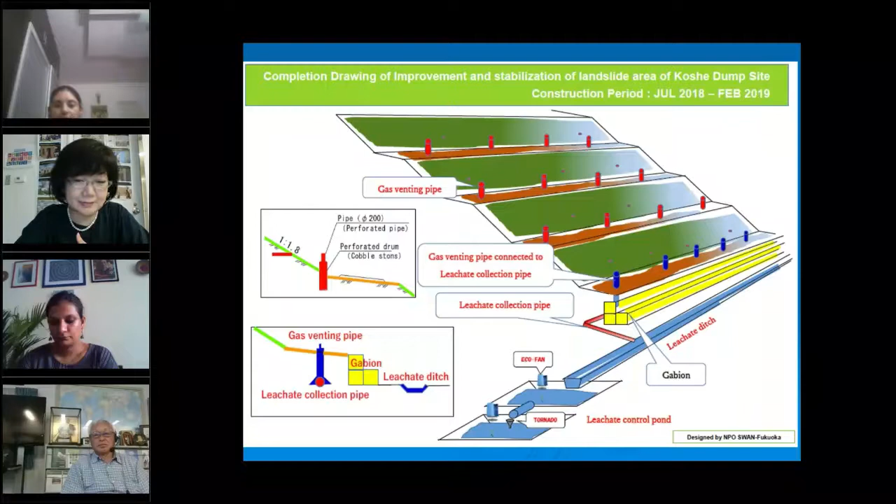This is a photograph looking at the completed slopes from the bottom, from ground level. You can see the white gas venting pipes installed on each of the waste terrace steps. This photo was taken 4 months after project completion, and you can perhaps see little greens already starting to sprout in some areas due to aeration and decomposition of waste.

This is another 2 months later. Greens are already starting to cover a large area of the improved slope.

This is still waste underneath, as you know. So we are also working with the city administration to plant trees and vegetables on the slopes for income generation for the communities. A windrow compost plant is also being built on another side of the slope to treat market organic waste, creating more stable income for the former waste pickers.

This is another dump site improvement project we are now undertaking in another city called Bahir Dar in Ethiopia. Before our intervention, it looked like any common uncontrolled open dump site, as you see on top.

Now it is close to project completion, and below is a drone photo showing how the embankments were constructed using old dump waste. This means you don't need to purchase fresh soil every time for construction—you can utilize recycled materials.

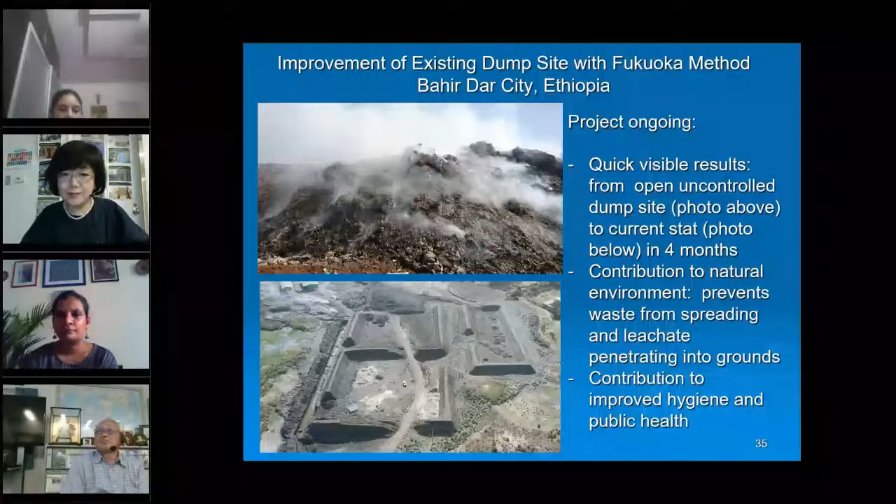During the process of our project, we always work together with the waste pickers. In the dump site in Addis Ababa city, there were an estimated 2,000 waste pickers at the peak. I'm sure many of the cities in India would share the same issues.

It is very difficult and sometimes high risk to operate the dump site safely and peacefully in cooperation with the waste pickers. We try to undertake training for the waste pickers and vehicle operators. If done properly, this raises the safety and efficiency level of waste pickers, and at the same time improves the spreading and compaction of waste by backhoe and excavator operators. This spreading and compaction makes a huge difference in prolonging the lifespan of the landfill site, making it stronger and more resilient to heavy rainfall in the long term.

Another recent project we are currently undertaking is a bit closer to India—this is in Yangon city, Myanmar. This is another capital city dump site with a total size of 120 hectares. It caught a major fire, possibly due to a combination of gas release and perhaps waste pickers putting fire on rubber tires or similar things.

The fire went on for more than 3 weeks, becoming a major risk for the city, and we were called to rehabilitate and improve the situation. So far, the dump site is formed into cells with firewalls, so that even if a fire breaks out, it will not spread into the next cell.

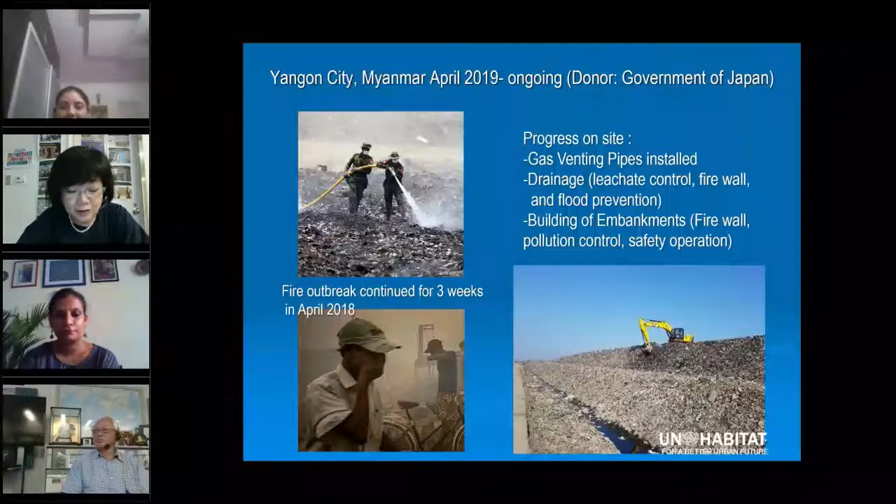Again here, gas venting pipes are being installed to release methane gas and accelerate degradation of waste, and drainage ditches are built to capture leachate and rain during monsoon seasons. In the current COVID situation, traveling to the site is unfortunately not possible, so we are undertaking online video meetings with Yangon City partners and the UN Habitat Yangon office every week to monitor progress and provide technical inputs.

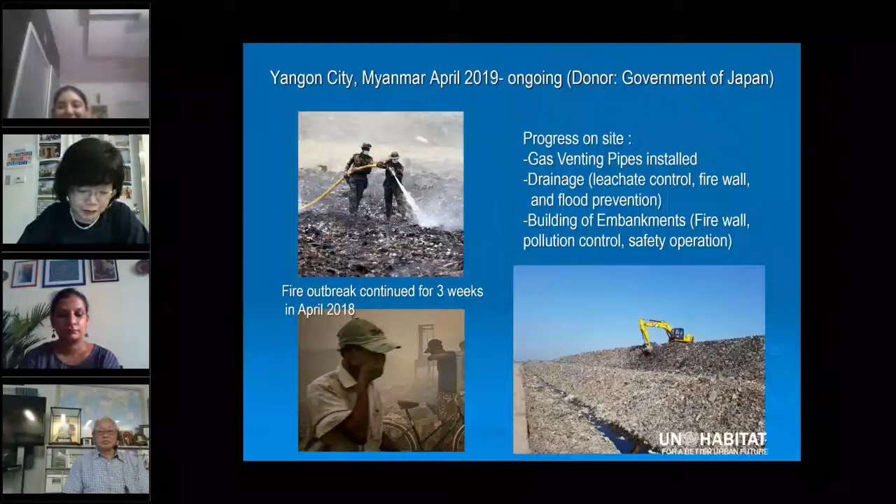In every landfill improvement project that we undertake, we also undertake on-site surveys and monitoring of gas and leachate. As you see in the photographs, this is from Myanmar. We try to demonstrate the mechanism and process of leachate treatment and how it can be improved.

I am nearly at the end of my presentation. The key takeaway message we would like to extend to all partners today is that among various methods and technologies on treatment of waste, the strength of the Fukuoka method lies in its ability to reduce pollutant of leachate, to reduce methane gas emission, and it allows us to reuse and recycle the completed landfill as a precious piece of land, in particular sometimes in city centers.

And it is also possible to do so in a simple, low cost, and environmentally sustainable way.

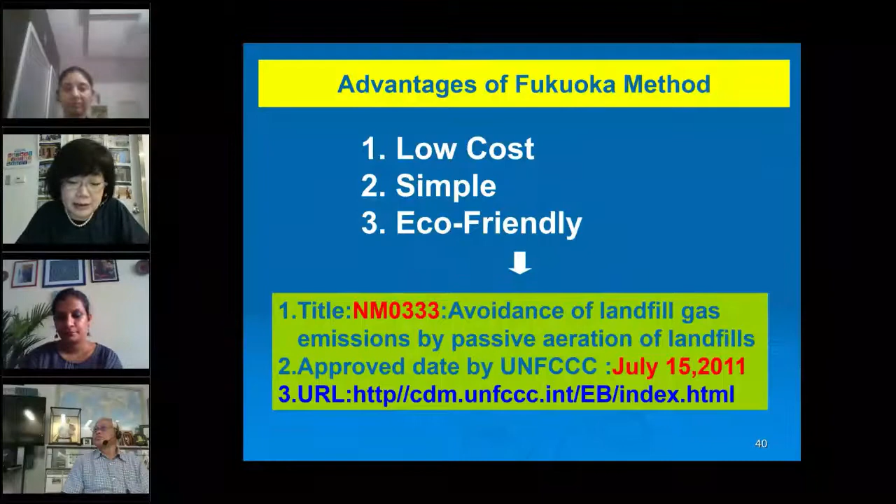Thank you. Today we only have time to explain about the Fukuoka method itself. And of course, we fully realize that building an efficient landfill does not solve all of the problems of waste management. However, we have experienced in many places that this has been a very effective entry point, or leverage point, to either kickstart or accelerate the improvement process. So I hope this information was useful for you as well. Thank you very much, dear participants, and we look forward to further discussions. Thank you.